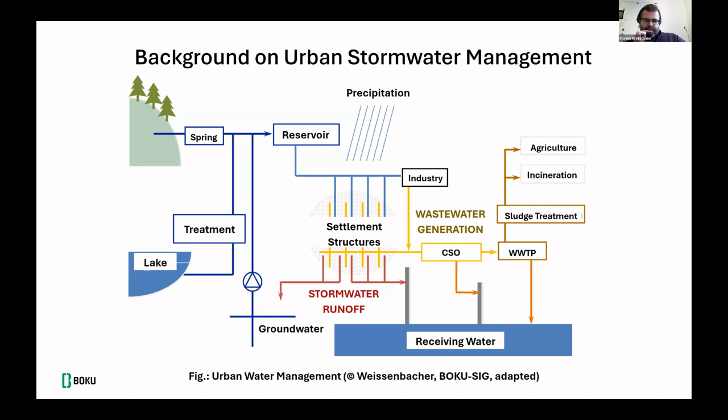I was mentioning this more innovative approach to stormwater versus the conventional way we had. When we think of the characteristics of those two approaches, we can think of the structural design of the components. Usually our existing drainage system is based on an underground pipe network and underground structures like manholes, pumping stations, storage facilities, and the like.

The more innovative approaches now, which are either called blue-green solutions or nature-based solutions, can mainly be found above ground. They often also include vegetation, which can clearly be derived from the name blue-green already.

When talking about the aims of those two approaches, the conventional way of discharging stormwater out of our settlements had the aim to protect the settlement from pluvial flooding. This also somehow addresses human health issues, but the main thing we must always keep in mind is that it was to protect the settlement structures from urban flooding as best as possible. We want to avoid stormwater in the basements, in the subways, and so on.

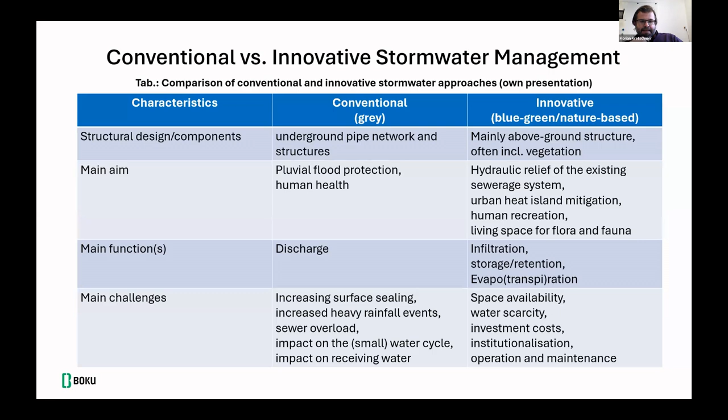This brings me almost to my last point, to the recast of the European Wastewater Treatment Directive. We had the old directive - I cannot remember how old it actually was, but quite some years. Of course this was a nice directive, but there were some open points.

Basically, three major open points could be identified. The first was that we still have remaining pollution from urban sources - we have new pollutants, but also stormwater runoff, for instance. Then we have gaps in relation to the Green Deal, which mainly deals with renewable energy and energy efficiency, but also with circularity, which brings us to the stormwater reuse topic. And there is certainly some optimization potential in terms of governance towards transparency in operators' performance, monitoring, and so on.

These open points also have a relation to stormwater and to blue-green infrastructure or nature-based solutions. Because when we deal with stormwater pollution, we have stormwater inlets to the receiving water, and we have combined sewer overflows. Those inflow points can be a point of pollution for the receiving waters. So this is an issue we certainly have to tackle for the upcoming years.

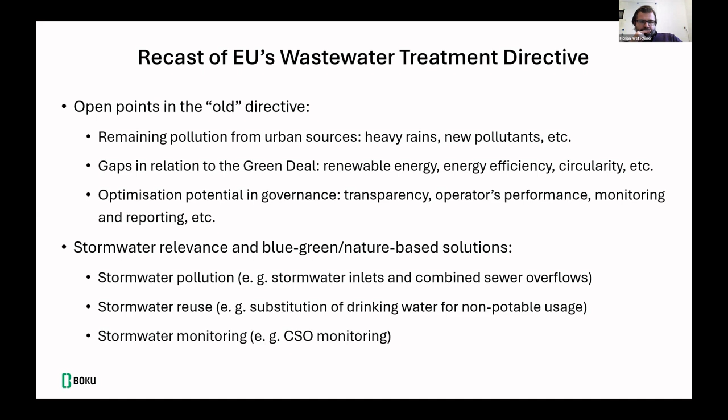Just to conclude, some take-home messages. Climate change, we're all aware, is a major challenge for urban water management and urban stormwater management - on the one hand because we have extreme storm events, on the other hand we have long dry periods.

The existing infrastructure, the gray infrastructure, is here. So there's no need to reinvent the wheel, but we need a combination of the existing conventional assets we have and the innovative solutions.

And finally, we need integrated thinking. It is not helpful if we think in a drinking water perspective, a wastewater perspective, and an urban green perspective separately. We have to integrate the different stakeholders, the different perspectives, and also develop appropriate institutional frameworks to deal with the new challenges. And we need life cycle perspectives and life cycle concepts.

Today we plan the blue-green infrastructure, the nature-based solutions - we build them, but the operation is still a big question mark. If we tackle these issues, we will also be somehow prepared to tackle the challenges of the new wastewater treatment directive.

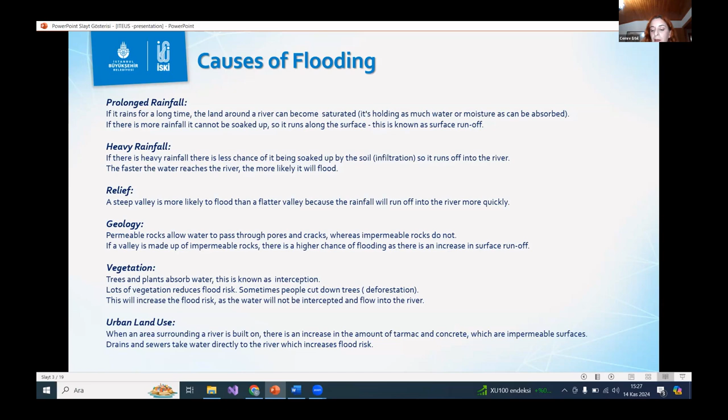As for causes of flooding, many factors can cause flooding, stemming from both natural and human activities. For example, prolonged rainfall, heavy rainfall, relief, geology, vegetation, and urban land use. Another factor is climate change.

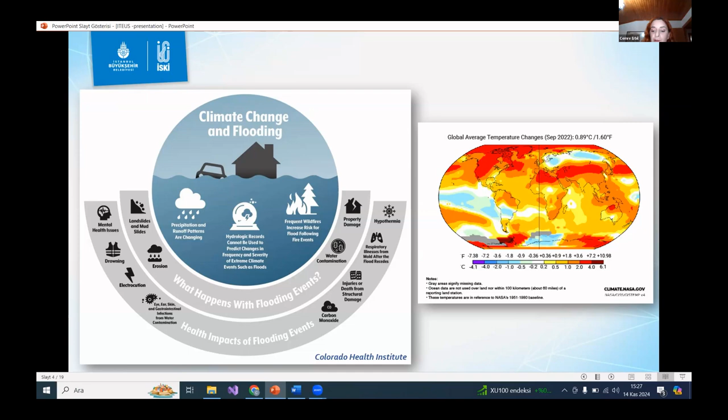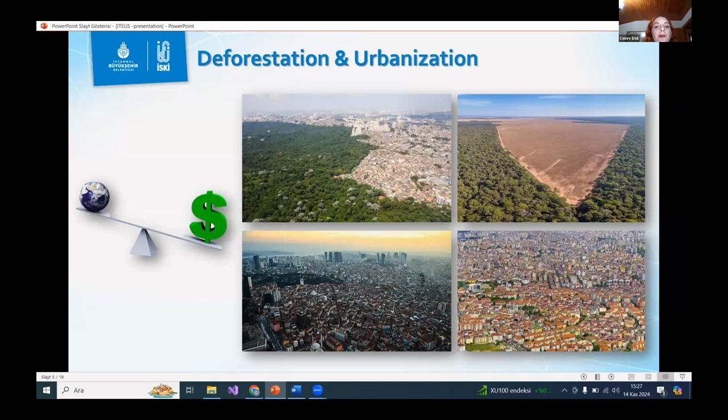Climate change is one of the biggest factors in the occurrence of flooding, caused by excessive rainfall and sea level rise. Climate change increases the risk, escalating both the frequency and severity of natural disasters. Another factor is deforestation and urbanization, which also increases flood risk by reducing natural water absorption and increasing runoff into rivers and streams.

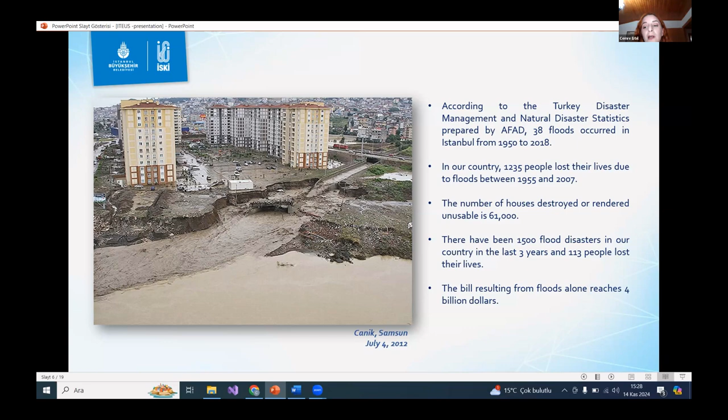According to the Turkey Disaster Management and Natural Disaster Statistics prepared by AFAD, 38 floods occurred in Istanbul from 1950 to 2018. In our country, 1,235 people lost their lives due to floods. Lots of houses were destroyed or damaged, and the bill resulting from flooding alone reaches $4 billion.

We can examine flood prevention strategies under two main categories: hard engineering and soft engineering. Hard engineering includes infrastructure solutions like building dams and reservoirs, river strengthening measures, or creating flood relief channels to help control water levels.

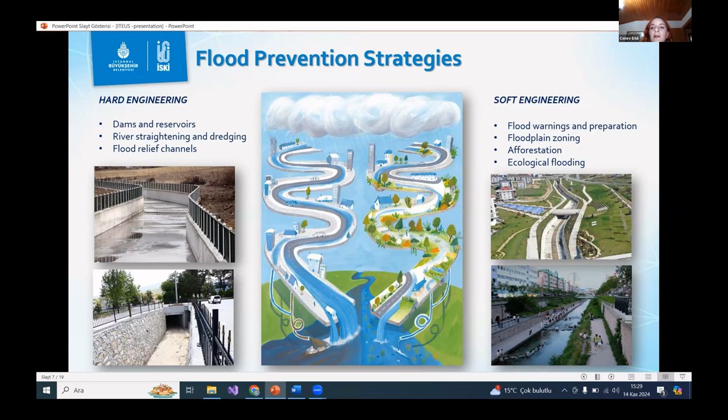Soft engineering includes more environmentally friendly solutions, like flood warning systems, floodplain zoning, afforestation, and ecological flooding, aiming to reduce risk while preserving the natural environment. Up until now, we at ISKI have worked mainly on hard engineering, but now we are starting on soft engineering.

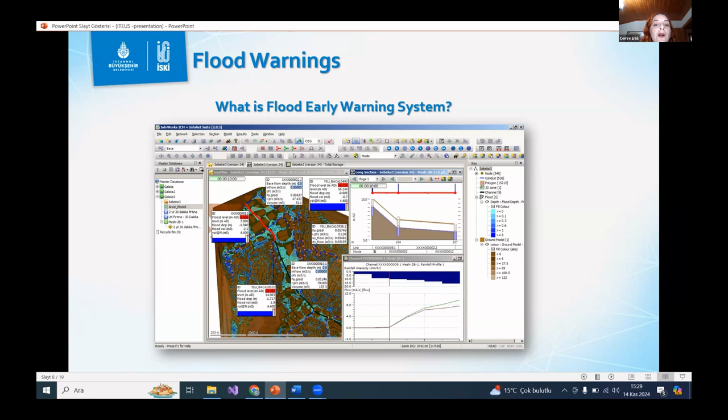What is a flood early warning system? It is a system that prevents loss of life and property by predicting flood risk. The system identifies flood risk using data from various sources, like water level, rainfall, or terrain, to issue warnings to relevant authorities and the public.

The Istanbul Flood Early Warning System was developed by the Istanbul Water and Sewerage Administration. This system is supported by InfoWorks ICM and InfoWorks ICM Live software. These tools have 1D and 2D model capabilities and integrate hydraulic and hydrological data for highly accurate forecasting.

Thanks to this software, we can simulate wastewater and stormwater networks. For example, if there is heavy rainfall in an area, we can predict how the water will move and identify the areas at risk.

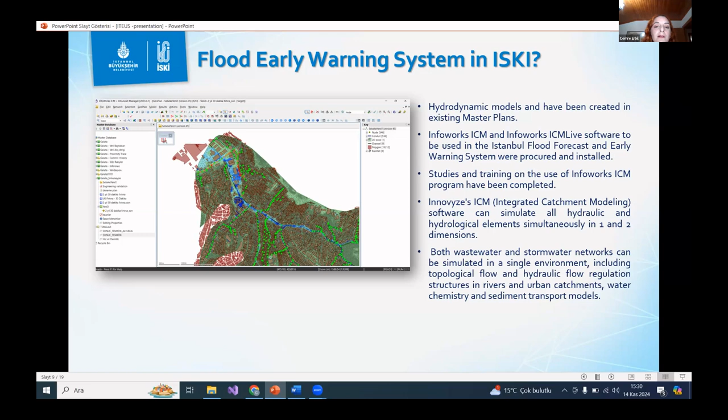There is a video here. This system uses real-time weather data from the General Directorate of Meteorology and provides instant updates and warnings in risky situations.

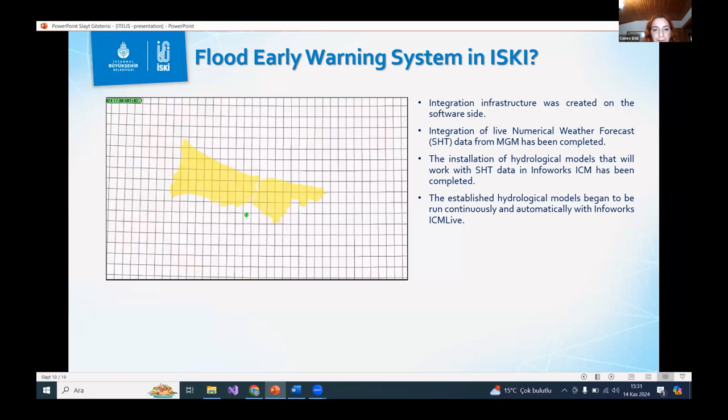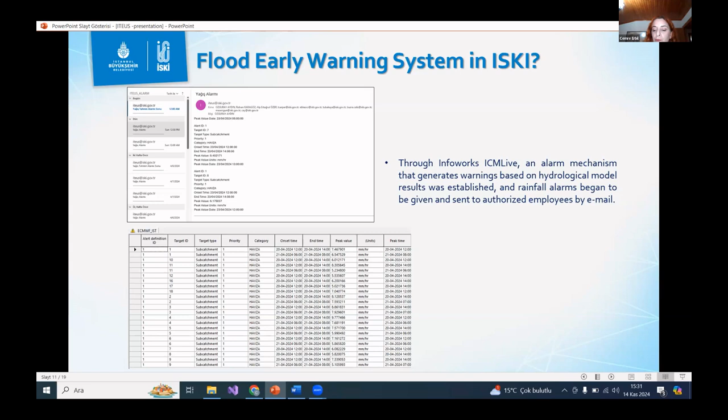Rainfall alarms are automatically generated based on model results and sent to authorized employees via email. The real-time warning system is a major advance for fast and effective intervention during emergencies.

To illustrate the system's functionality, a pilot project has been carried out in the Cendere Basin in Istanbul, where daily flood maps are produced. The pilot project has been a very important step in testing the system's effectiveness.

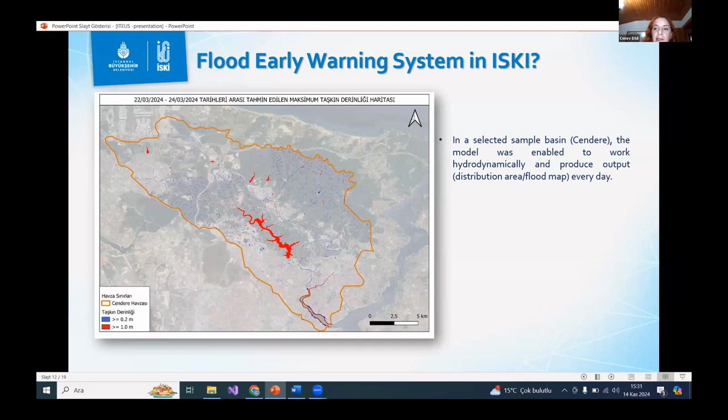For the early warning system, the first step is rainfall forecast, then hydrological modeling, and finally hydrodynamic modeling.

Flow measurement: we can determine the change in water level with stream gauging stations, flow meters, and dome cameras. But we are currently in the first stage, and we only work with simulation, and the system sends an email according to the simulation result.

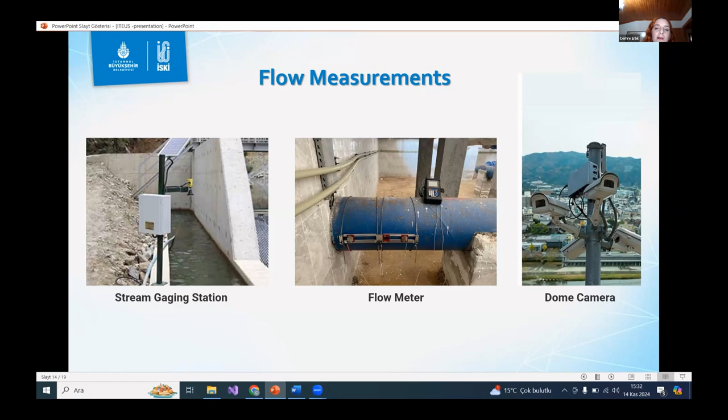When we move on to the second stage, the model result will be compared with the real result, and the alarm will be given accordingly. We have just started this work, so we believe it will develop over time.

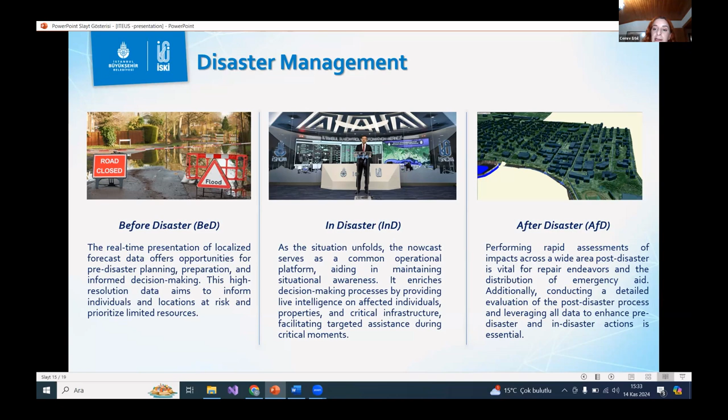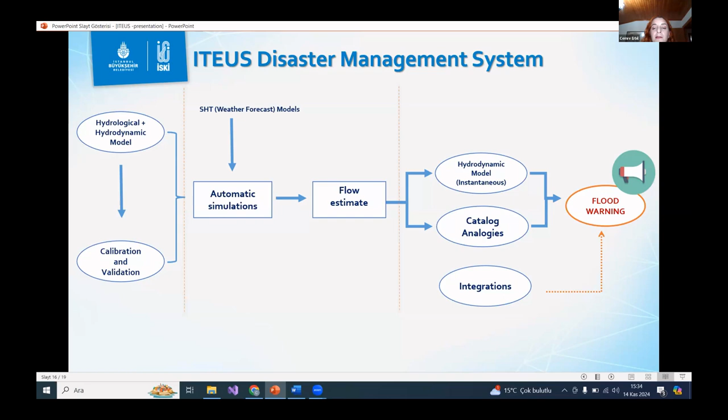This is the ITEUS disaster management system, Istanbul's flood early warning system. The system first simulates flood risk using meteorological forecasting along with hydrological and hydrodynamic models. Flow estimates are obtained from the model results and then compared with the real-time hydrodynamic model. After this process, if the risk is high, the system sends a warning to the authorities.

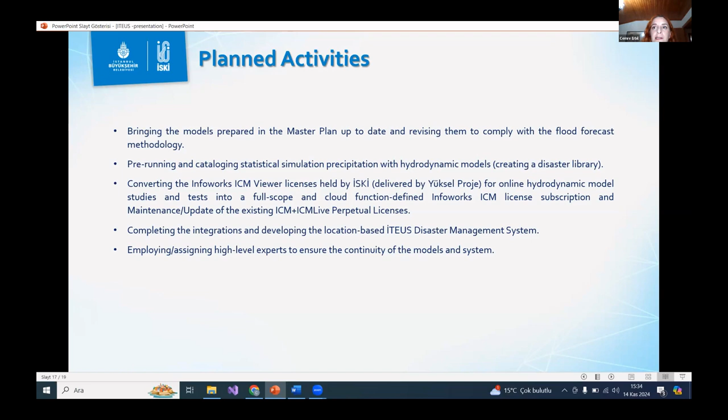Planned activities: the development of ITEUS is ongoing, with some planned projects and activities aimed at strengthening this system in the future. These plans include integrating new data, updating the hydrodynamic model, and adding higher resolution weather forecasts to the system. With these improvements, İSKİ's flood early warning system will make Istanbul even safer.

Regarding the cost of ITEUS, we are currently in stage 1 and used a perpetual license, but this license type is no longer available, so an annual fee is charged now. For stage 3, the pricing is not yet determined, in accordance with the public procurement law.

Thank you. Can you see? Yes. Please just go to presentation mode. Thank you, I'm trying. I don't know what's the problem, but I will try again. Is it okay now? I cannot see it in full screen mode, but just go through the slides as they are, to not lose more time. I think they're big enough. Okay. I'm so sorry, something went wrong. No worries, I know it worked before for whatever reason. Okay, let me see. It's okay now. Yes, it is, okay.

So I'm from Pula, and we have a big problem with flooding. The title of the presentation or the webinar is Taming the Rain, but I think that we cannot tame the rain.

Why am I saying that? Because this is a dangerous paradigm. According to the EU Green Deal and Green Infrastructure, landscape architects here in Croatia think it is good enough to plant trees and bushes together with landscape design to tame the rain. But what if we have impervious soil like the one we have in Pula? We cannot even mitigate climate change for now, we have to adapt.

I will show you in the following slides, and I will present NBS case studies for Pula. Yes, we solved the problem with rain and flooding, but we have to change our way of thinking.

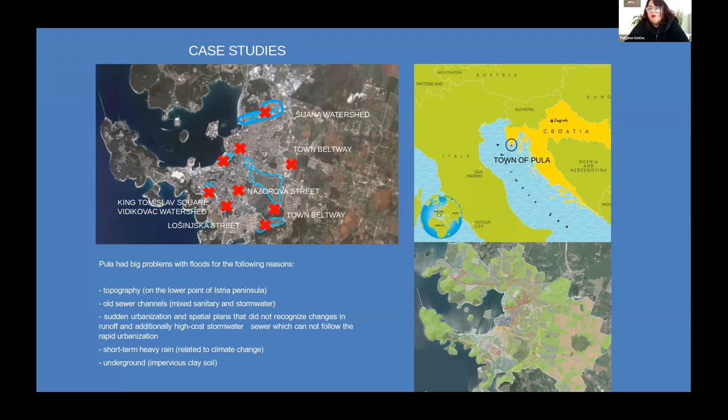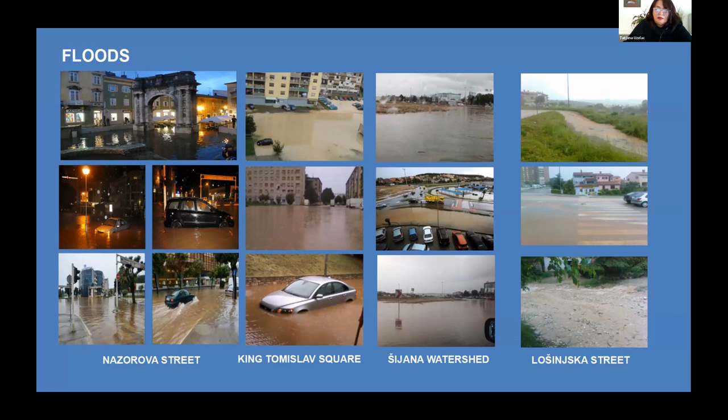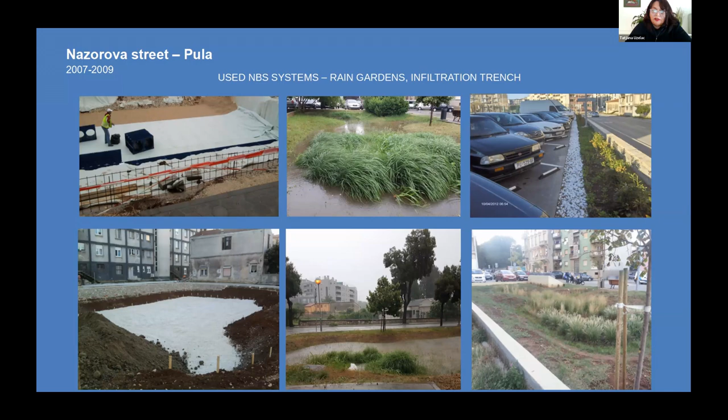We used NBS systems: rain gardens and the infiltration trench, like I said. We used an NBS solution with 3 rain gardens, underground retention, drain cells, and an infiltration trench for the parking lot. The calculation method was the rational method.

This is a cross section for direct flow and indirect flow. Direct flow comes from pavement or the parking lot, and indirect flow can be used from the city sewer.

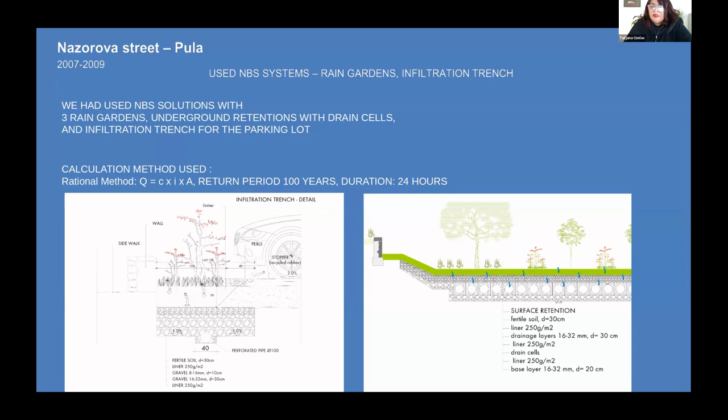The second example is the town beltway. Although the project was already finished, it was found to be too expensive, and the oil and grease separator for stormwater treatment was not available and too big. We also applied the NBS system here.

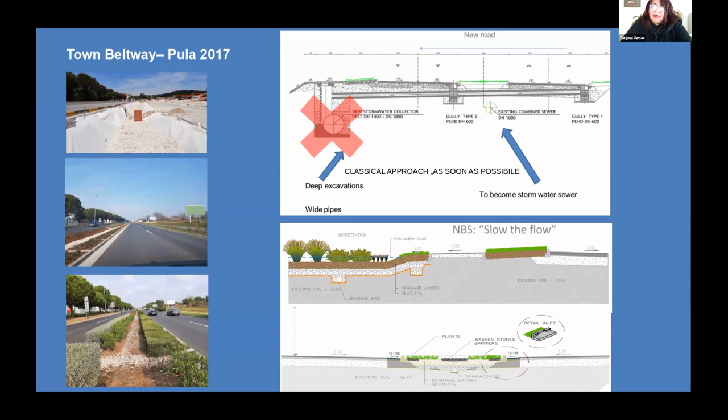The picture shows the construction of the infiltration trench, its cross section, and the difference between the classical and NBS approaches. The classical approach is as soon as possible, like in sanitary sewer, but the NBS approach is to slow the flow.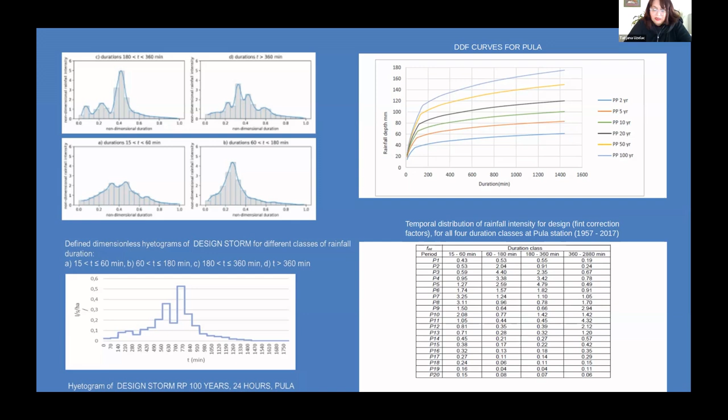We use the modified Santa Barbara method for calculation. We first calculated and chose the design storm from DDF curves, then did a hydrological study and temporal distribution of rainfall intensity for the design storm, for 4 durations, at Pula station, using time series from 1957 to 2017.

With that calculation, we made the Excel table on our own, because we don't have rules or norms here, and all needed material we got from the USA Environmental Protection Agency.

This Excel table shows in light orange color the calculation without the perforated pipe in the drainage layer, and the blue part shows the calculation with the integrated perforated pipe, because we have impervious soil and have to store excess water at another place or recipient. A small picture shows the flow hydrogram without and with the perforated pipe if the soil is impervious and we cannot directly infiltrate the stormwater underground.

With this Excel table, we can check the water depth in every minute per 24 hours in the drainage layer, and we can choose at which height we will put the drainage perforated pipe.

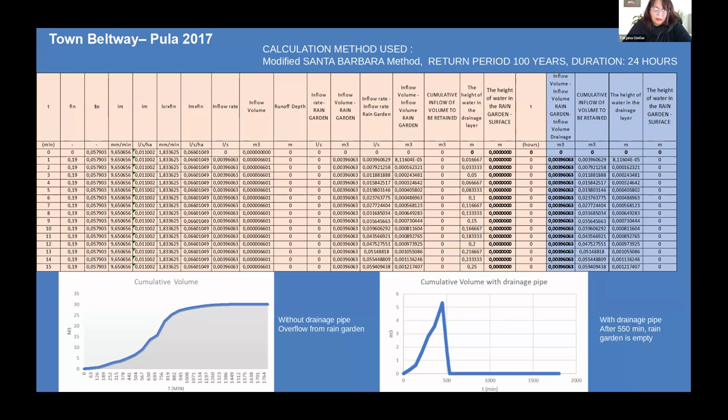The next example is King Tomislav Square. The picture shows the architectural design and hydrotechnical design with rain gardens and underground retention.

We used the rational method too, with a return period of 100 years and duration of rain of 24 hours. We used 16 rain gardens, underground retention, and infiltration trenches for 2 parking areas.

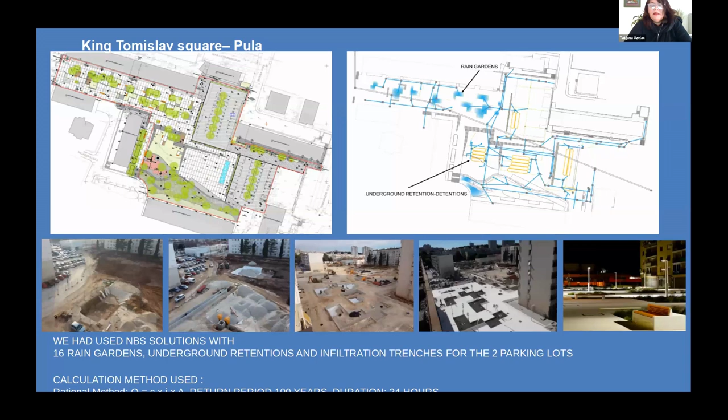The plants we used are grasses such as Panicum virgatum or similar, and carex or similar, for purification, and trees for reducing the urban heat island and sequestration of CO2.

We used underground retention with a storage volume of almost 6,500 cubic meters.

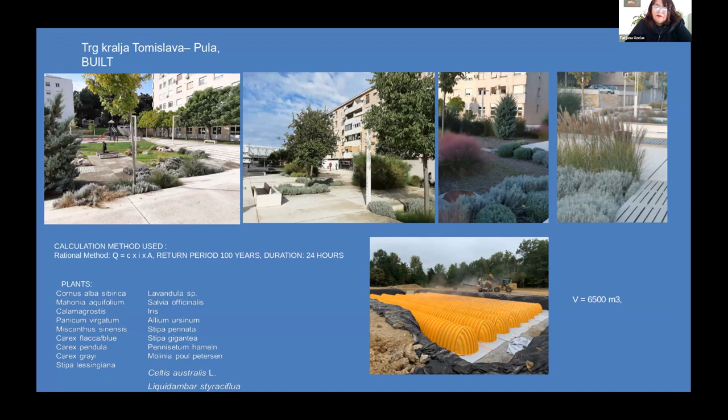The next slide is interesting because the town department did not allow stormwater discharge from private parcels directly into the town's combined sewer. We had almost 500 liters per second from the city mall area, and the town department allowed only 20 liters per second.

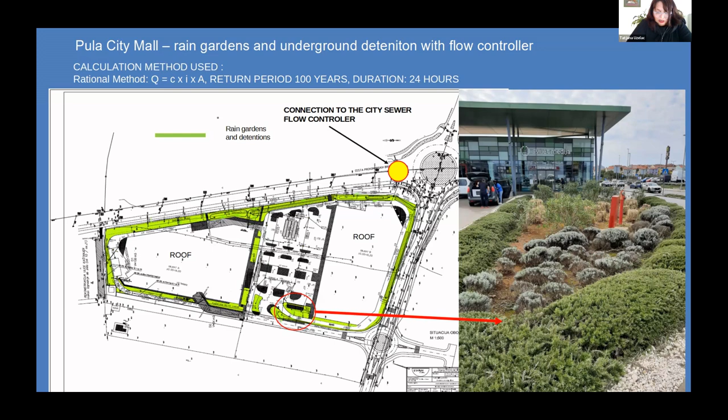So we used rain gardens and underground retention, and before discharge we had to control the amount of discharge.

Before connecting to the town sewer, we had to use a mechanical flow controller. This is a simple metallic plate built into the main manhole. During heavy rainfall, the controller will be activated, working on the principle of the pressure difference between the water level in the city sewer and the water level in the manhole.

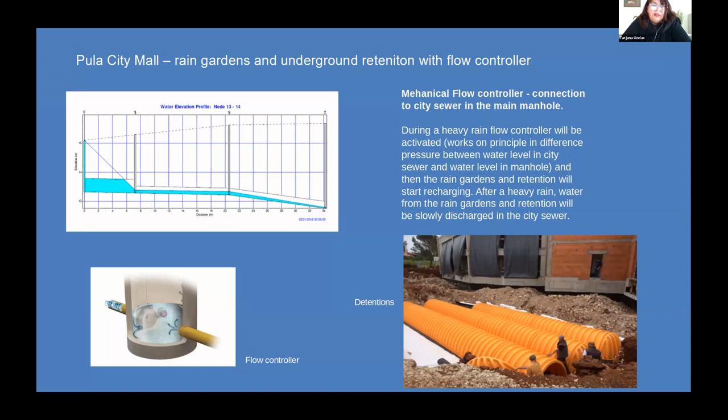The rain gardens and retention will start recharging during the rain. After heavy rain, water from the rain gardens and retention will be slowly discharged into the city sewer. Of course, we had to make a mathematical model for the whole area.

This is another example, Lošinjska Street, and how we can protect the downtown area from hill water. We use hill retention and dry walls, check dams, rain gardens, and at the end of the street a pond for excess water.

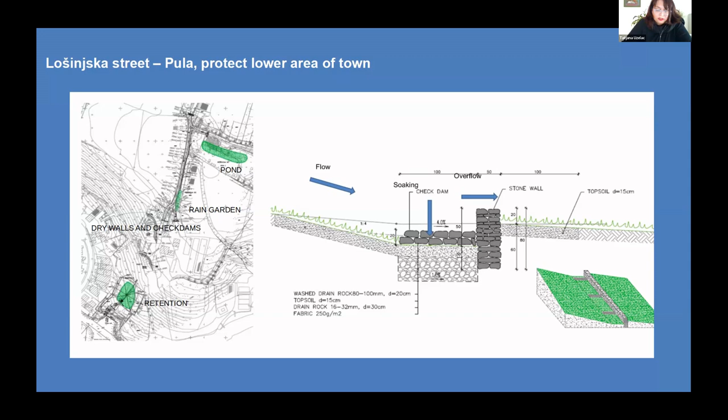These dry walls inside, before planting, show the terraced terrain construction, and there's a pond at the end of the street.

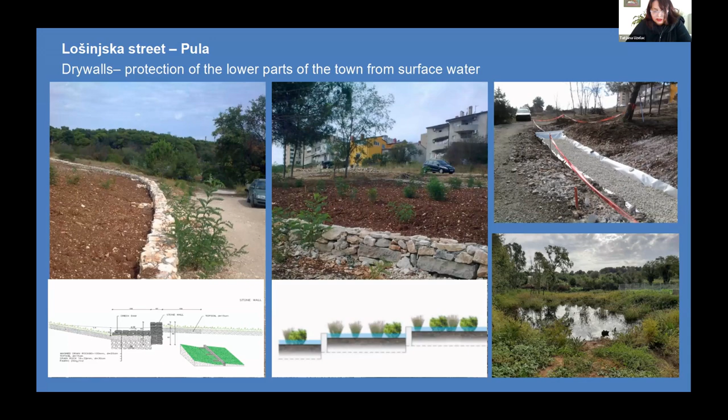The Šijana watershed is approximately 500 hectares in size. The drainage from the Eastern Highway ends in the city, so we had to build lagoons in the center of a roundabout to collect that water and save the city from flooding.

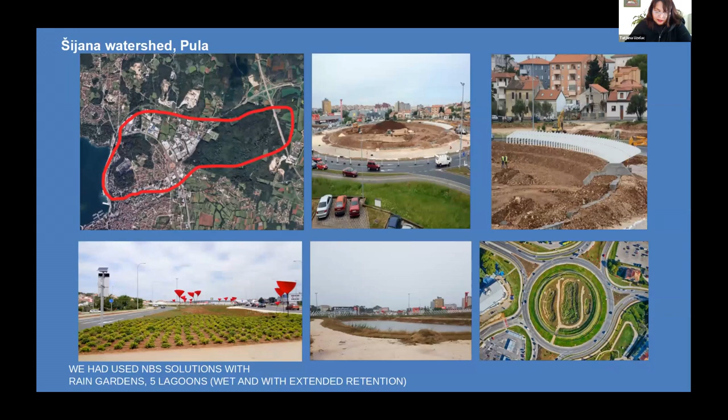There are 5 wet and extended retention lagoons in the entire basin. Drainage from local roads is solved through rain gardens.

After several built systems, we analyzed these NBS systems and concluded that they are much cheaper and significantly reduce the pollution burden. A SWOT analysis shows strengths, weaknesses, opportunities, and threats.

Strengths: it protects property from water damage and flooding, and provides an ecological solution, including rainwater harvesting.

Weakness: lack of regulation. The connection between concept and construction is not well established, and some stakeholders are also yet to be convinced of the effectiveness of NBS methods and practice.

The future approach focuses on urban space planning that is publicly visible, technically simple, and beautiful. The biggest threats are lack of knowledge and so on.

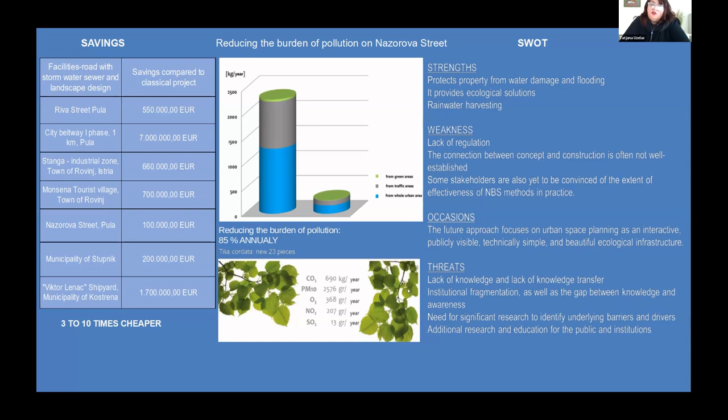This is an application guideline for designers. First, the drainage system should take full advantage of existing vegetation and natural drainage. If possible, build the drainage system before constructing the building.

The design begins with the discharge of collected water. The calculated discharge quantities must not exceed the existing downstream capacity, to reduce the possibility of flooding, erosion, habitat degradation, and the burden on the existing drainage system. Design so that the drainage system requires minimal maintenance and cost.

Drain surface water to permeable and green areas and depressions to increase infiltration. Apply terrain shaping techniques and use depressions for water storage and infiltration. Design retention space with sinusoidal banks to ensure more space for littoral vegetation, a greater number of plant species, and better aesthetic impression. Place entrance buildings and water intakes in grassy areas, not asphalted ones.

On traffic areas, use gutter construction with side openings for even distribution of inflow over nearby grassy areas and ditches. Locate protective buildings within the road belt, dividing belt, or traffic junction.

Application guidelines for planners: all plans must have the possibility of the NBS systems. The management of precipitation inflows at the planning level for each location should be based on, and in accordance with, the plan of the entire basin.

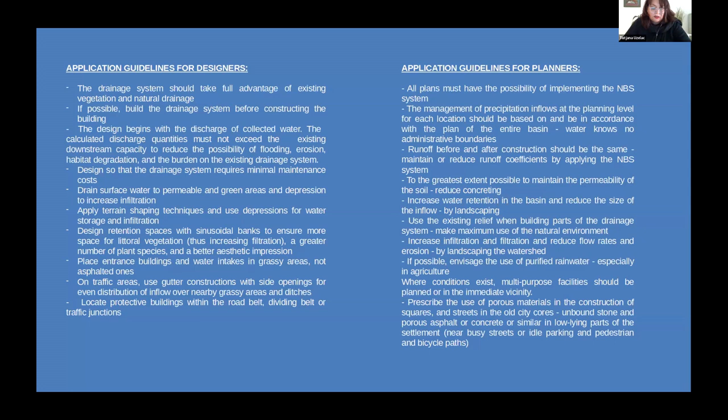Methodology for micro scale: analyze the possibility of water remaining in the natural basin, analysis of engineering geological maps.

Hydrological study, IDF and DDF curves, then choose design storm, analyze the runoff coefficient due to spatial plan, analysis of the watershed according to natural and anthropogenic factors, in situ infiltration measurement, planning of the main drainage channel, recipient, determination of the recipient, determination of one or more landscape techniques depending on the part of the settlement and the size of watershed.

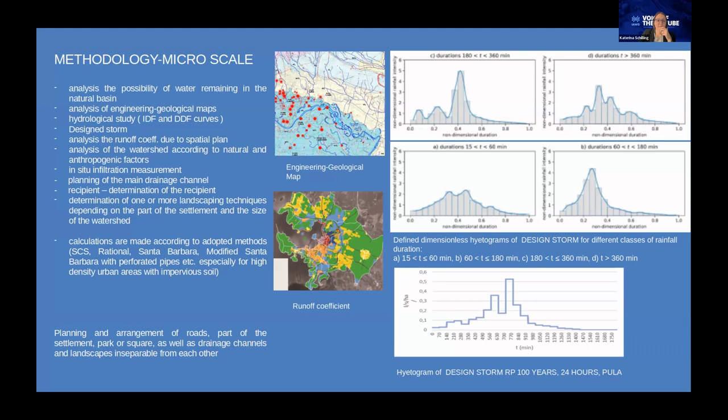Calculations are made according to the adopted methods: SCS, rational, Santa Barbara, modified Santa Barbara with perforated pipes, etc., especially for high density urban areas with impervious soil. Planning and arrangement of roads, parts of settlement, parks, or squares, as well as drainage channels and landscape, are inseparable from each other.

This is the methodology for macro scale for spatial planning with GIS technology and HEC-RAS software, for pilot projects Split, Zadar, Biograd na Moru, Poreč, Gospić, and Metković, with Interreg Italy-Croatia stream. We use the catchment scale, city scale, and sub-basin scale.

We try to recognize hazard. Hazard is water depth, water velocity, and flood severity. And the combination of this hazard, we can calculate flood risk and direct damage.

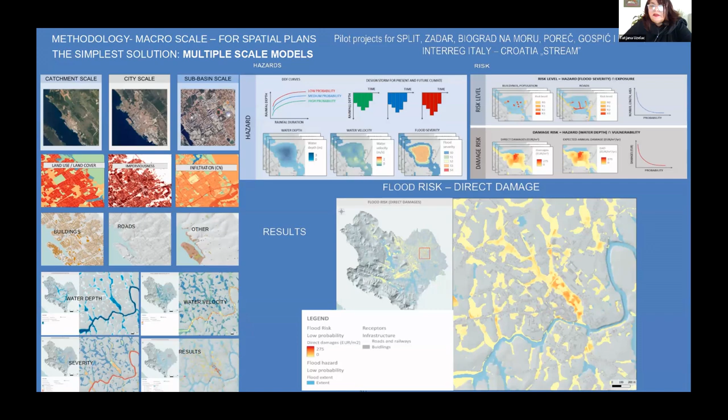And for Croatia, direct damage amounts to 275 euros per square meter. This is a historic flood for the town of Poreč with a hydrodynamic model. What is important is that we can predict flood for a chosen design storm.

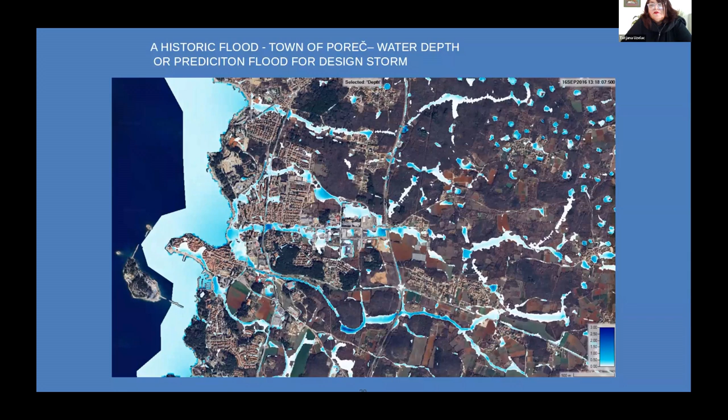And finally, why we cannot tame the rain: people are part of nature, but imitating nature as a whole excludes human activity, and thus the very existence of people in certain areas. Our opinion is that the holistic approach to the problem is the only correct solution.

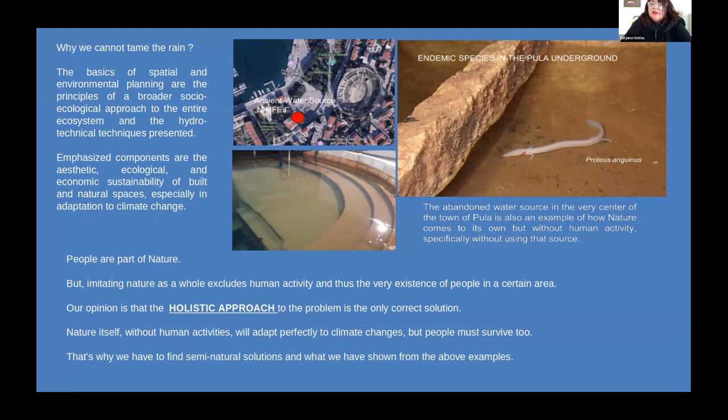Nature itself, without human activities, will adapt perfectly to climate changes, but people must survive too. That's why we have to find semi-natural solutions, as we have shown from the above examples. Thank you for your attention.

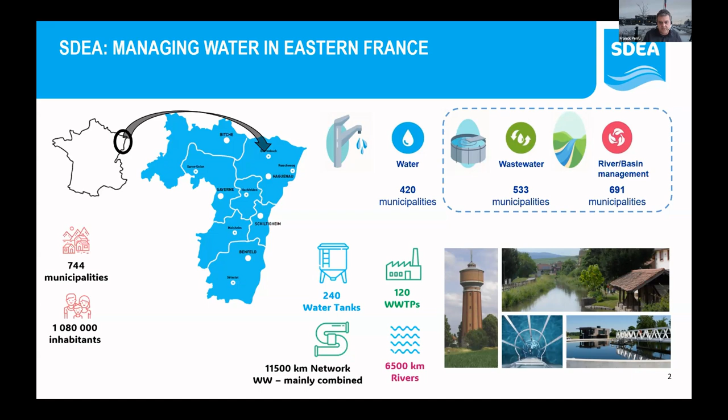The vast majority of our networks are combined, mainly for historical reasons. When they were built, our predecessors were told it was better that way, and we've had quite a big reversal on that over the last 10 years. So we have some very visible effects of pollution here in rural Alsace. We don't manage big cities, Strasbourg is independent, so we manage small cities.

We are prone to flooding from our own sewers and from external reasons. So our main impacts of big rainwaters are floodings and overflows, and our objective is to reduce flooding. Evidently, for our population it's quite important, and we have an objective under French law, which is to keep combined sewer overflow under 5% of the rating of all the water coming into them. The next European objective will be 2%, so we have quite a big gap to close on that.

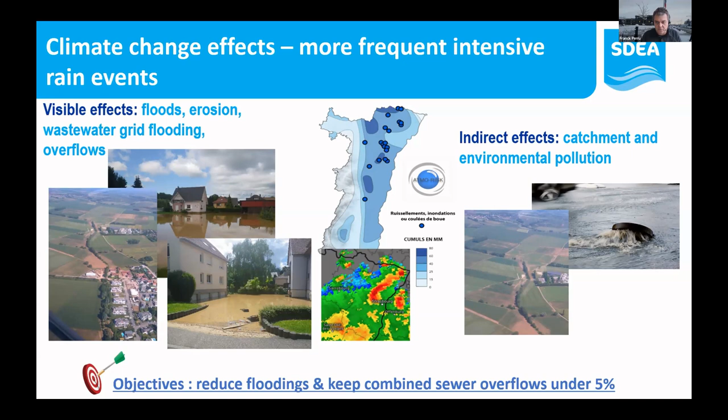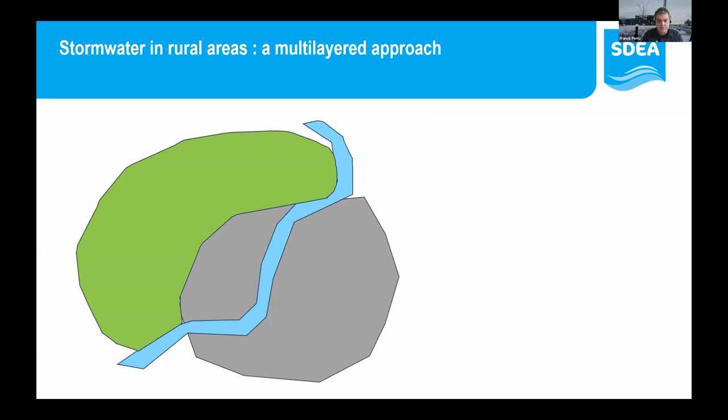So our small cities are prone to flooding from 3 layers. The first is from upstream - you have small rivers there, and they can flood your city. A secondary effect is that flows cannot discharge into the water if the water of the river is higher than your overflow point. So that's our first source of flooding.

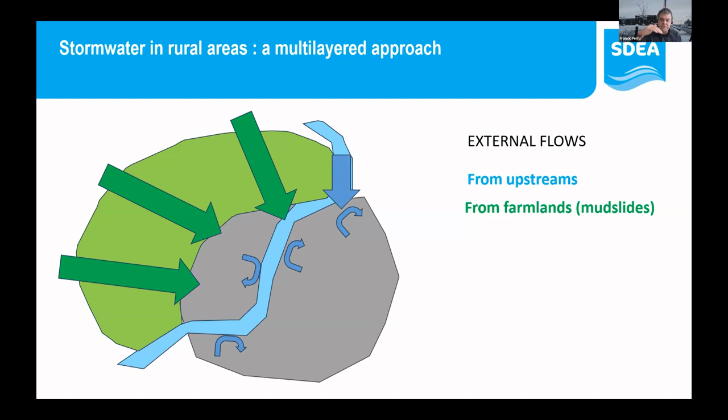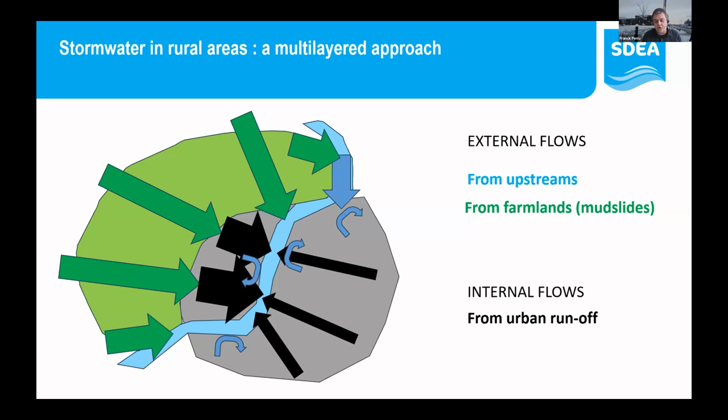The second source of flooding, and the most important here, is from mudslides, from farmlands. You have a big river basin and a big concentration catchment area which will come into your city from upstream, and the city is flooded by its own farmlands. And you have internal flow from urban runoff, which you saw before - we are also a victim of that.

So we use a 3-tier preventive plan with the main stages you all know: avoid, reduce, and compensate. In all our practices, we tend to associate various partners. Our main partners, essentially on mudslides, are the farmers themselves. We have to cooperate with them to reduce mudslides, mainly through better farming practices. Secondly, we can work on river restoration, soft hydraulic practices. And we also use traditional hydraulic techniques and runoff diversion, which are gray techniques - I won't talk much about that today. So we tend to cooperate first with farmers, and secondly with cities to permeate cities. I'll show you some examples.

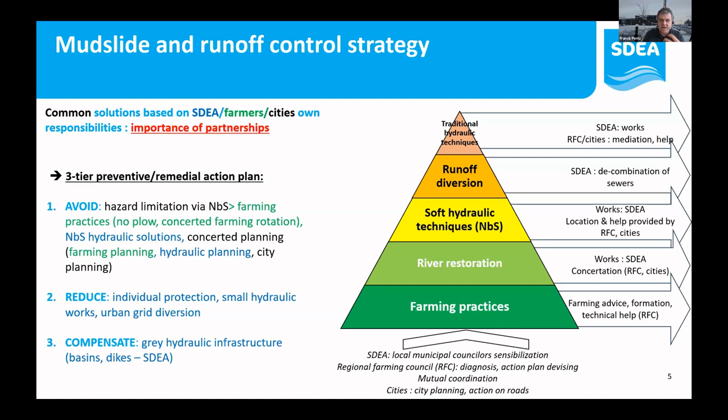First layer, mudslides. You have 2 solutions there: better farming practices, which include no-plow techniques, because if you plow the soil it tends to be more prone to mudslides, and better crop selection. We have a big array of crops here. The most problematic is corn, because corn tends to grow after the period when we have the most storms, which is late April to June. So we cooperate with farmers to change their crops, which will in turn diminish the flow we tend to have from mudslides.

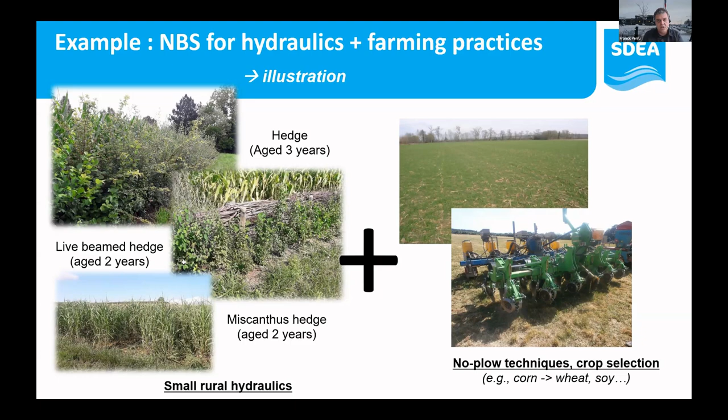And we have curative approaches, which are small rural hydraulics, mainly using hedges. You can plant hedges, small trees you find on French farmlands, and more exotic ones like miscanthus, or more technical ones like beamed hedges. All three solutions tend to work quite well. We have some results there, which were financed by a LIFE project.

We have very good mudslide limitation, and we tend to cooperate with cities too. Our urban planning is now considered to be more resilient. You have to adapt your city because mudslides will happen no matter how good your solutions are - you cannot tame more than, I think, 30 or 40 year return period events with those solutions. So quite big events will have to be taken into account differently by urban planning, by letting the flow cross your city rather than flooding it.

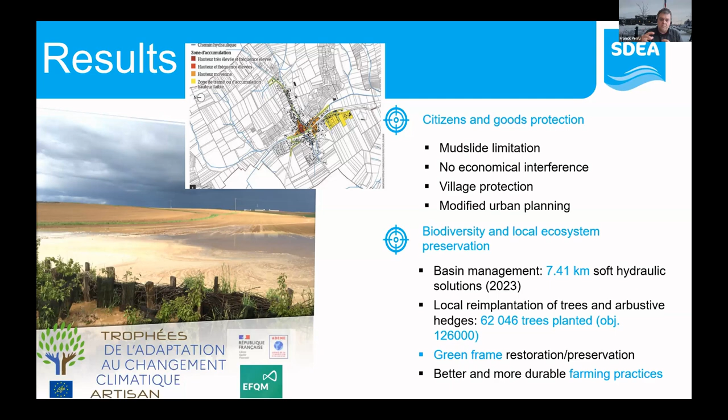So we planted a lot of trees, and we tend to now plant a lot of hedges to limit those flows from farmlands. You have to limit the flow from the river. Those are quite classical solutions to manage rivers now. You have to manage the river from its natural course. You can't rectify rivers, you have to remeander them to slow the flow. And you can combine those solutions with the ones we saw before, like hedges, to limit the flow coming in on this image from the left.

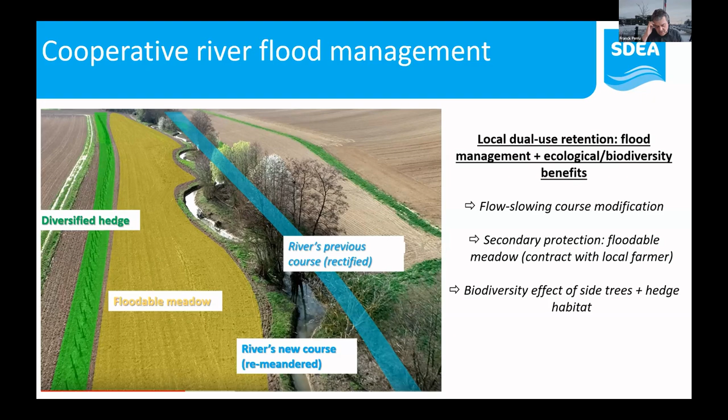And you can combine that with floodable areas. It will flow on the meadow and not on the city you have downstream. You have some quite good side effects there, like biodiversity and a more agreeable state of the river, which can be quite good to convince local elected officials and farmers.

Other solutions we have as our last line of defense outside the cities are floodable meadows. We build quite an array of those. You create a little meadow before the city, which will tend to absorb the small events. The mud is blocked in your meadow, so it's better for the grid afterwards. And you can infiltrate small events, so less rainwater comes into the city. It's quite a good technique if you have some space upstream of your city.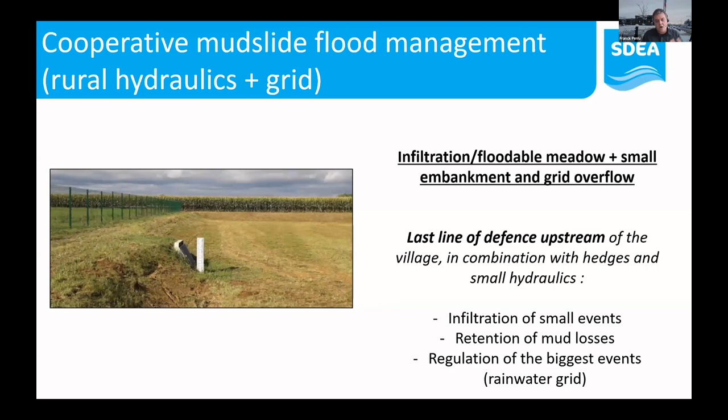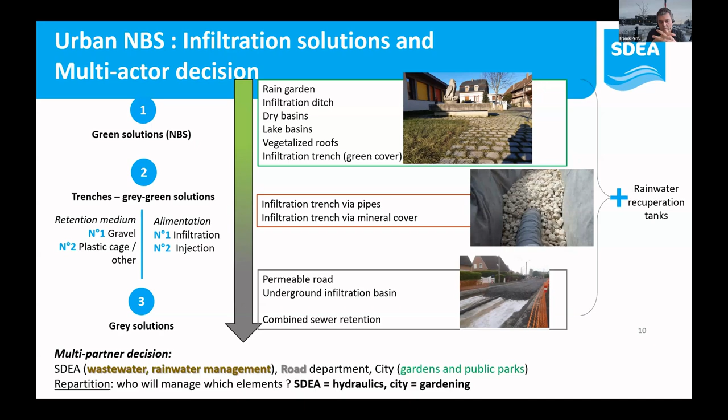And in the city properly, we use the techniques you saw before. So we tend to prioritize greener solutions, but we don't forbid ourselves from using grayer solutions too. The main problem here is managing all that with other partners, the road departments and the cities, because these solutions have to be taken into account with multiple partners, and partnership is very, very important there. It's our main focus here. You cannot manage nature-based solutions alone.

Some examples here. We have quite a big focus these days on schoolyards because you have big surfaces on schoolyards. This one in the photos represents a quarter hectare, and you can disconnect quite a big surface on schools. It has some good side effects because you have less island effect. You have better education about nature for teachers, and you have more gender inclusivity.

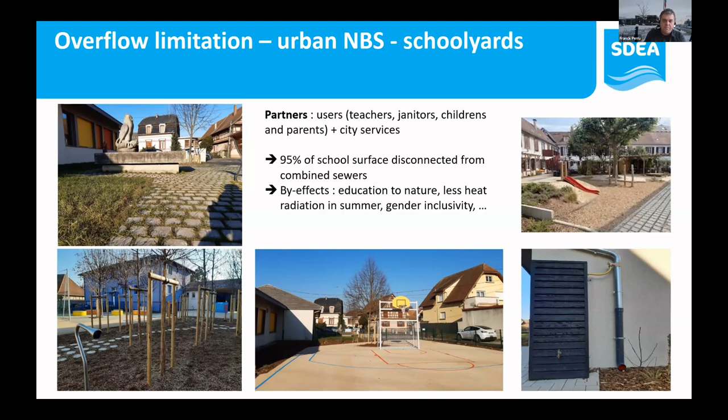All those solutions were made by associating users. Users are evidently the children, but also teachers, janitors, and the parents. If you do that with them, your solutions are better accepted. So even in that, partnerships are quite important.

Other solutions you saw before are quite classical techniques: road disconnection. We tend to let the flow infiltrate itself on parking lots you have on the sides of the roads, and we have some partnership for housing disconnection. We ask everyone to disconnect themselves from the grid. We pay for a small tank to keep rainwater for themselves, to irrigate their garden for example.

And you have a big acceptability of that if you associate the population themselves. They need to be associated in that. So to conclude, you have to take into account a very, very big array of partners. Without them, you can't go far. They are your main incentives, they are your clients, and without them, you cannot do anything. Thank you.